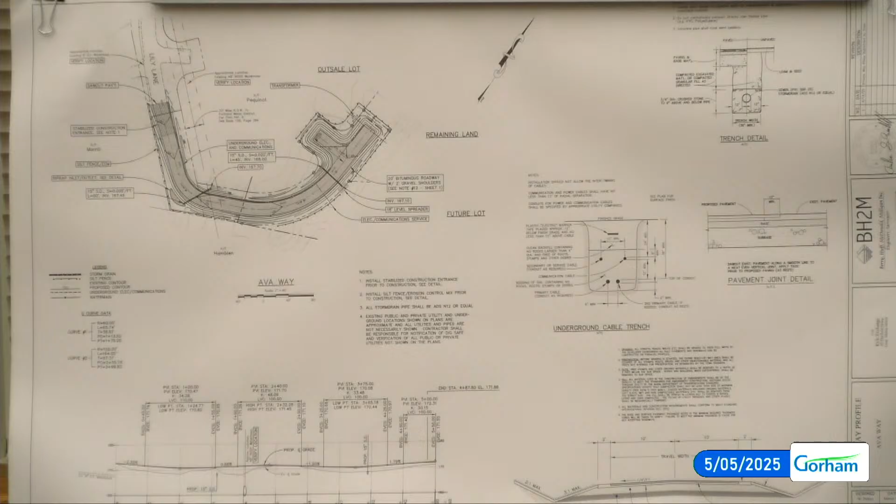So thank you, Damon, for that introduction. As he stated, this is a proposed private way, which is kind of a strange situation. This will be an extension of Lily Lane, built to a public road standard and offered to the town as a public roadway. There is no mechanism to propose a public roadway to the town directly, so the application for a private way was submitted, and if the town decides to accept it as a public roadway in the future, that's what it will be.

As I stated, this is an extension through an existing right-of-way at the end of Lily Lane that is town maintained and owned. Kyle has gotten permission to build a road through it and extend to his land to serve currently 2 lots, which will not trigger subdivision review.

Based on recommendations from Public Works, this will be built as a 24-foot roadway, 20 feet of pavement with 2-foot shoulders. This was a recommendation from Terry Deering, to have a continuous roadway through, so that if it is accepted as a public roadway, it won't cause issues with maintenance or having a private agreement off the end of a roadway, which could get tricky. So currently, let me flip this plan around.

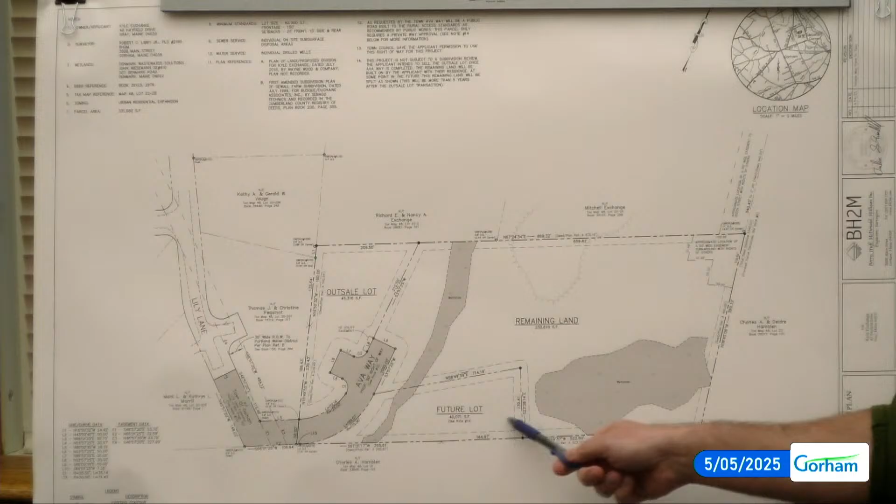Kyle is planning to split off what is shown as the outsale lot and build a house for himself on the remaining land. Just to show everybody the intent for the future, there may be a lot split at least 5 years from now in order to not trigger subdivision approval. As Damon mentioned, we'll take that off the plan to make sure there's no confusion about what's going on with the project.

During the PRC meeting, a few comments were brought up that are also in the staff review memo, including removal of the future lot from the plan and showing the snowmobile track or path on site. It's my understanding the snowmobile trail runs along the edge of the proposed roadway. I spoke with Kyle right before I got up here, and he's willing to keep that on the property as long as it doesn't affect anything. It'll stay right where it is, and if anybody's looking for an easement, that could also be talked about.

We also got comments about the Portland Water District main and crossing it. Typically they'll allow you to cross at a 90-degree angle, which we are doing at this moment, just for access over it, and we can reach out to the Water District and get approval for that in the coming days.

The plan does currently show the road as Ava Way, based on a Public Works comment, just to make things linear and make sense, with no confusion. The proposed roadway will change from Ava Way as shown to Lily Lane.

All of the comments we received from staff are mostly minor in nature, like the snowmobile trail and getting some feedback from Portland Water District. So we would love to leave here with an approval tonight, but would be happy to answer any questions the board may have and talk through the project.

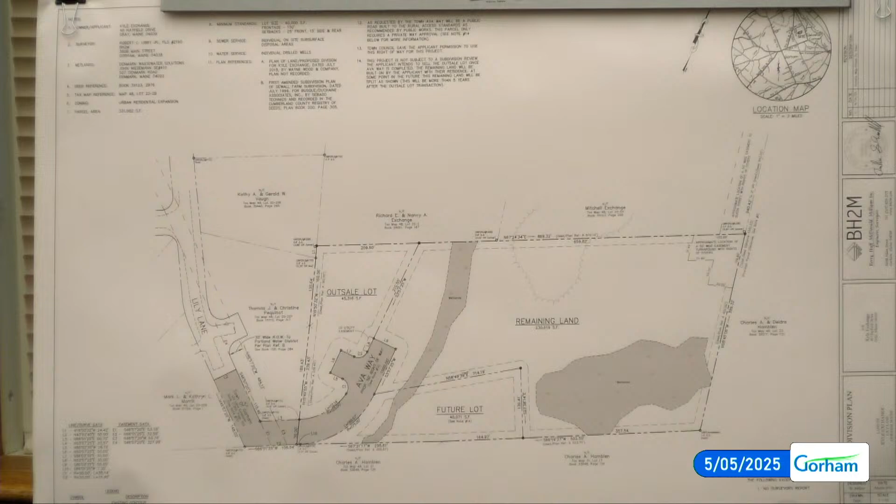With this property, this has been family land, my grandfather's land, and my father now lives out front. My brother is adjacent, and that third lot we drew on there just to be transparent, but my in-laws, my wife's parents, were looking eventually to get them closer to town. They currently live in Bridgton, so that's the idea. We just wanted to be transparent, but the overall plan is really a two-lot deal where I live on the remaining piece for myself and my family. The funny thing is I actually built the snowmobile trail when I was younger, so it was there before I put it in. We've been there for 70 years or so, and we're happy to keep it the way it is.

Thank you. Members of the board, any questions or comments? Mr. Walsh, please. Chair, just one question: can you show me how the driveway will come off for the home you're going to build? Absolutely.

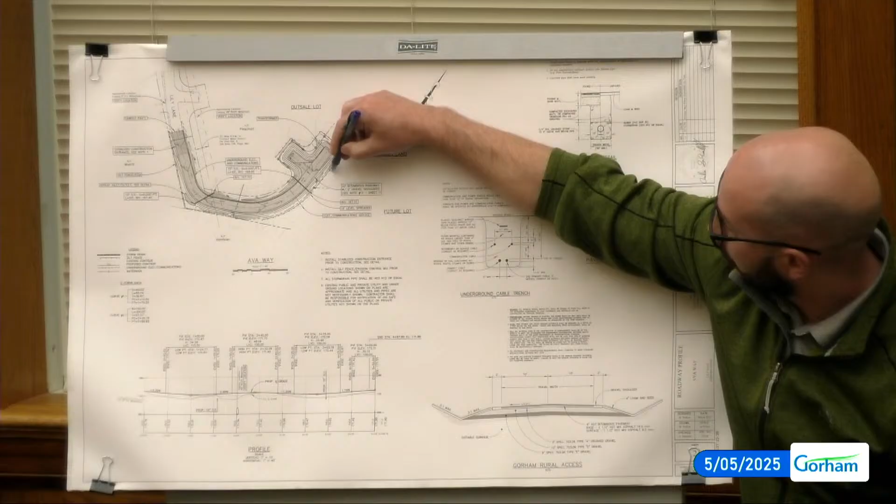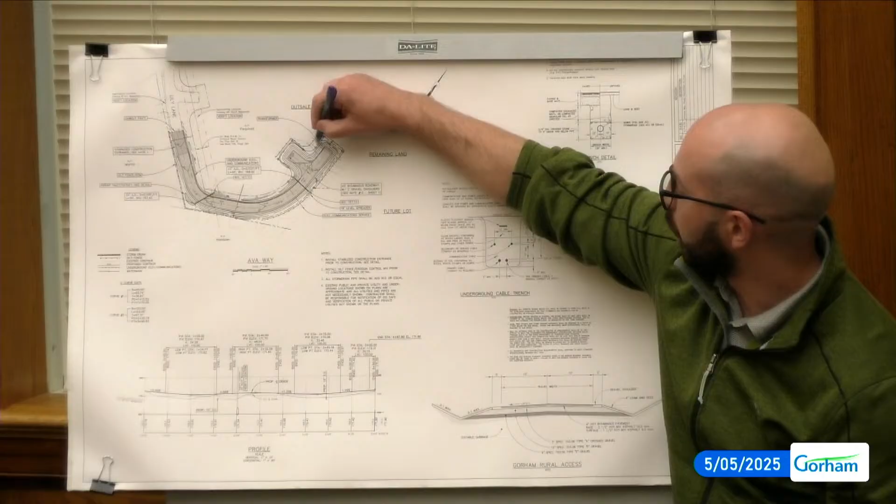For the remaining land, along this edge, I would assume towards the end of the roadway, they'll come off here. Kyle, this might be your preference. Yeah, there are two locations that could come off at the end of the hammerhead. Should be coming off the side, that way maintenance doesn't get affected with plowing, not at the end. So more or less at the end of the hammerhead, perpendicular, running parallel with the hammerhead turnaround in order to get to that lot.

Okay, as long as it's legal. I know the fire department gets really squirrely about use of the hammerhead. Fair enough. Terry reinforced it with me. I'm sure he did.

Just a question for staff? Mr. Walsh, please. No, there's a lot of yellow in through here, but it looks like just detail.

Is there anything in here that we should be concerned about, or is this stuff that you feel is just going to be cleaned up if we were to give it? What are we looking for tonight? Preliminary approval on this, or final approval?

Well, this is not subject to the two-stage approval. That subdivision is, so it's either... options are basically approval with conditions, or tabling. So yeah, there are some revisions that need to be made for sure.

One additional thing I should have mentioned is the Public Works Department was looking for a turnaround before the property line, so that's something we'd like to see added to the plan. I don't know if you had a discussion about that.

Yep, so I believe Andy and Kyle here spoke with Terry, and where this is proposed to be a public roadway, Terry was okay with the hammerhead being at the end of the roadway, so there's not a floating hammerhead on a public roadway and then an additional one after the fact. So that has been discussed with Public Works.

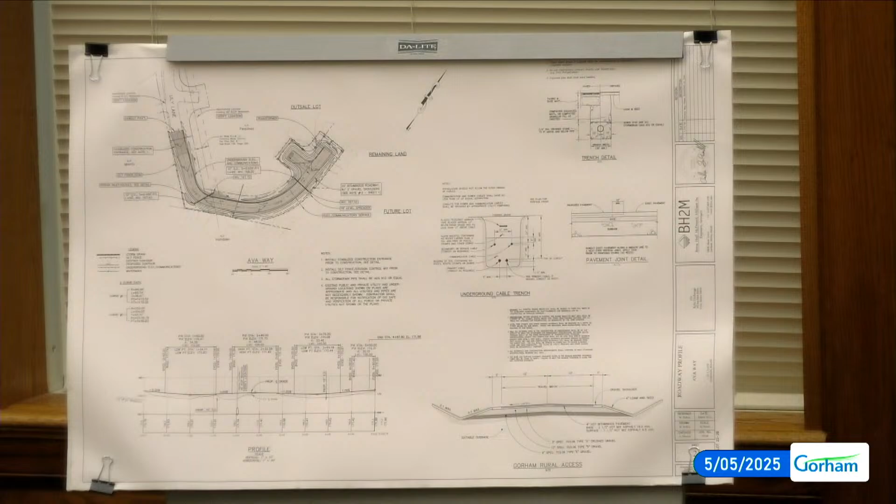That one's like 100 years old, right? Yeah, so with a water main of that size, they're not going to let you tap into it so you won't drain out Sebago Lake. Okay, but that's a big one. Yes, so just don't want to nick that one. Exactly.

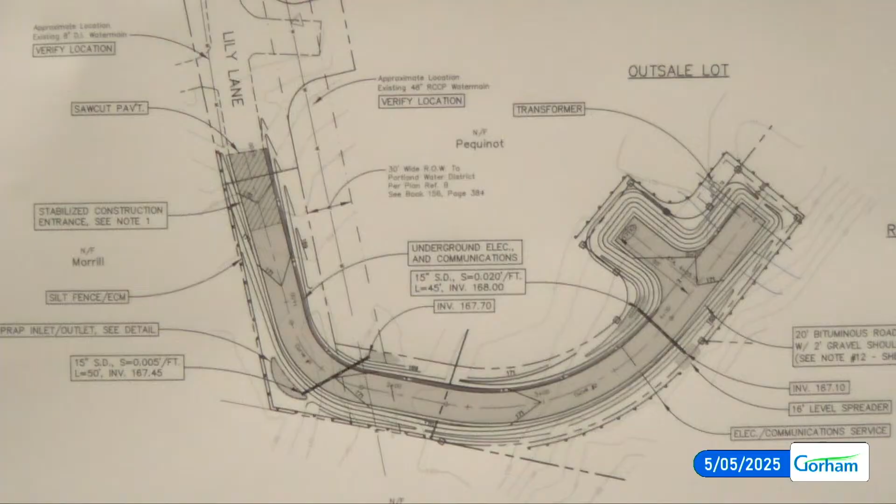And it is shown in the cross-section profile. Thank you. Okay, I have a question, and don't mind me, I'm a mechanical guy, I'm not a civil guy. If you would, in the upper right-hand corner of drawing 2, please - Note 1 says the trench width shown is pavement width for rock excavation.

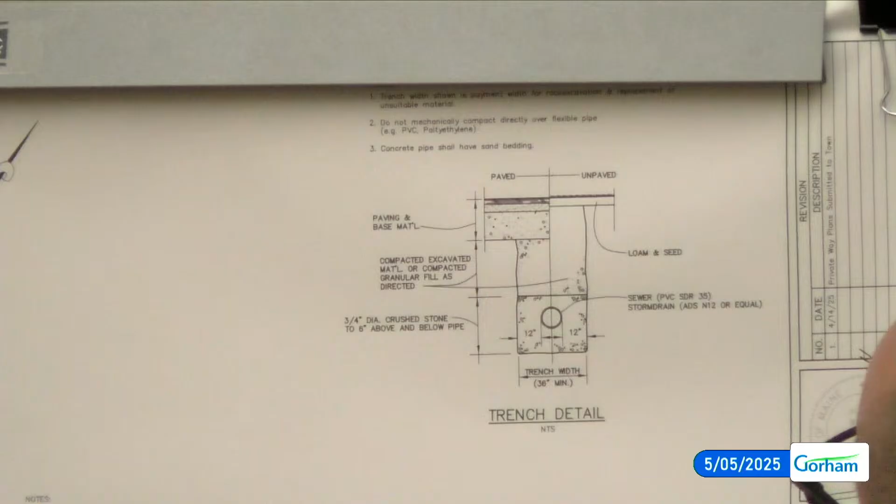That Y should be a V - pavement, it should be pavement, is that correct? Yes. Boy, you read drawings in detail.

In rock excavation, is that one word, or is that supposed to be 2 words? You're picking up on all the little things here. That's 2 words. Mr. Burrows, thankfully sitting here, reminded me years ago when I was sitting in the corner that all these things would be fixed later, and it's a discussion event, so let's discuss. That will be fixed. Is that a boo-boo? That's a couple of boo-boos right there.

Okay, I won't go any further then. I'll trust you, I'll take a double look at all of them now. On the underground cable trench, we have all kinds of widths, depths shown - I'm sorry, but we have no width shown. So it would just be whatever is required for the trench box to get in there, depending on the depth. There's really no specification that we have or any utility company has, other than making it work to install it. Well, there's some minimum requirements, so I didn't know how you were going to do that, but that's enough for me. Okay, thank you.

Anyone else? Going once?

Colonel, you look like you're going to... Sure, Mr. Chair, I'd like to make a motion. I move to grant Kyle Exchange's request for approval of a 500-foot private way off Libby Lane, designed to the town's 2-6 lot dwelling unit gravel private way standard, located on map 48, lot 22B, and situated in the urban residential expansion zone, based on findings of fact and with the conditions of approval as written by the town planner.

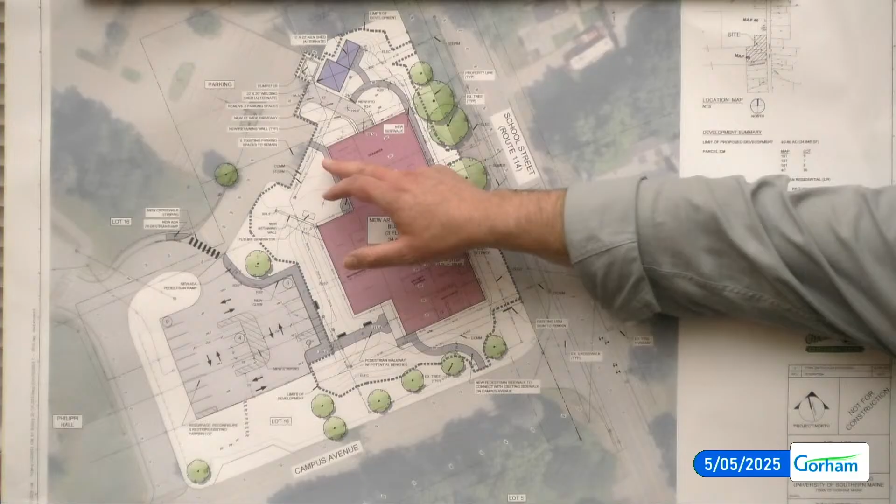The building's main entrance is in this location, as you come in just off this parking lot, so we can get a nice accessible entrance into the building. We're also looking at a loading entrance up towards the north side of the building. I say loading entrance, but really it'll be served by a box truck—they get a couple of deliveries a year for clay, so it's not heavy use back there, but they do need a place with an overhead door to get that material into the building.

As was mentioned, there's a number of programs being served in this building, from woodworking, sculpture, ceramics, drawing studios, to photography.

One of the big community assets this building offers is a great program—the rec program calls it the Art Lab. The thought is that'll be one of the classroom spaces coming into this facility, giving a new opportunity for tie-ins with the rec program and the Art Lab program.

As mentioned, we're looking at two potential alternates down the road for outbuildings toward the north side—a welding shed and a future kiln building. Those currently exist up by Robie-Andrews, and the thought is that down the road, should the budget allow, those facilities would move over here, which would be a good location with good proximity to the new building and make that connection a little better.

The idea with keeping them separate from the building is for code reasons—separate structures. We'll keep the separation distance, but having the welding and kiln together works well from a code point of view.

We also had a good conversation with the fire department about locations for sprinkler access and getting a fire truck in and around through these lots. We've run the auto-turn for that, just to make sure those fire trucks can get in and out with no problem.

And that's what I had for comments. Thank you.

Everyone catch all of that? Mr. Walsh, please—do you have any elevations or drawings of the building at this point?

We have some massing studies I can show you if you want to see those. Yeah, just more curiosity—I'd like to see what it would look like.

We haven't gotten into it yet—we're still working on programming the spaces and really trying to dive into how these spaces will lay out. So we haven't done anything with windows, layouts, or fenestration and things like that, but we have looked at massing for the campus. What we're looking at is really three volumes.

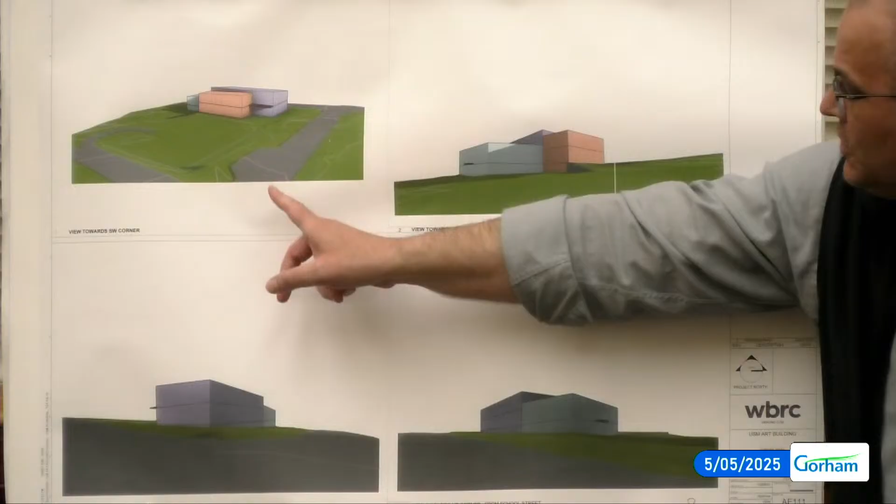So you have this larger volume, this purple tone up here, and this would be the entrance here, with Campus Ave right here. Let me use the microphone—there we go, thank you. So looking at three volumes here.

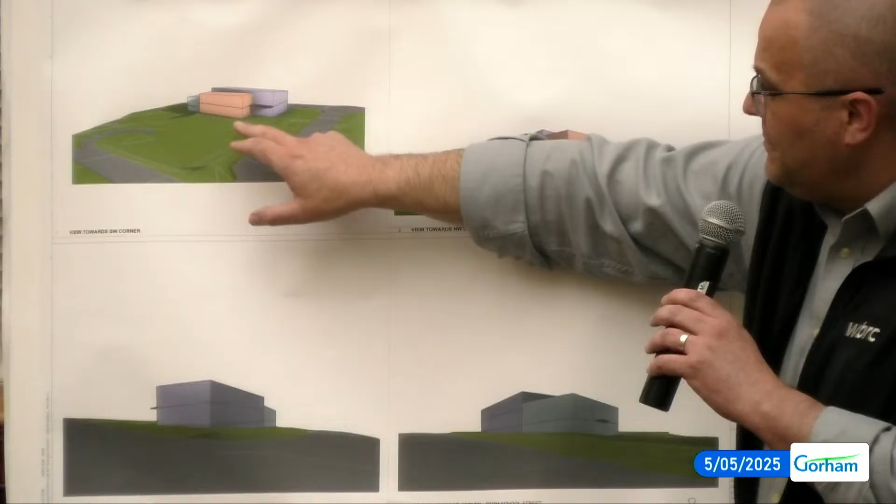Here's Campus Ave coming in, and here's the parking lot in the foreground. The main entrance to the building would be in this area. We're looking at three volumes, and they'd be flat roof volumes—a larger volume in the background, a volume that steps down in the foreground, and then this lower piece, with deliveries coming in around the back.

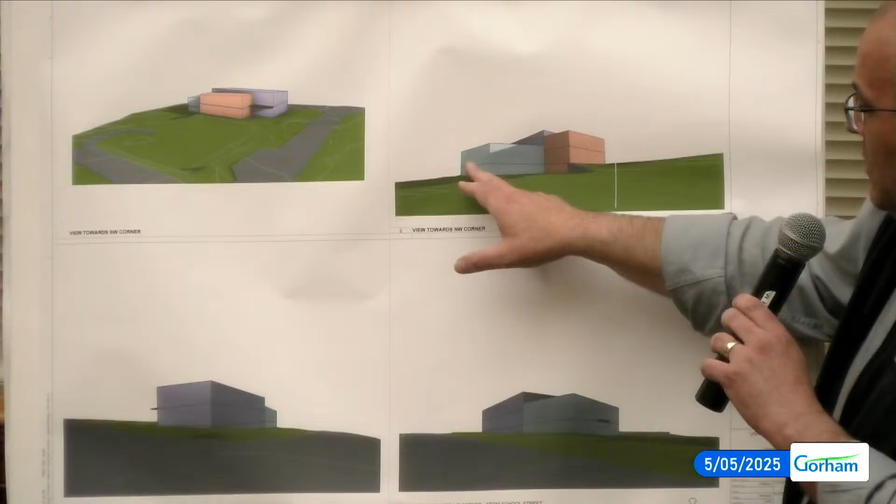We've done four views here just to give an idea from this massing. Here's the view from the northwest corner, looking back toward the building. We have a retaining wall here because of the grades we're dealing with. This canopy would be where we'd locate the overhead door for deliveries.

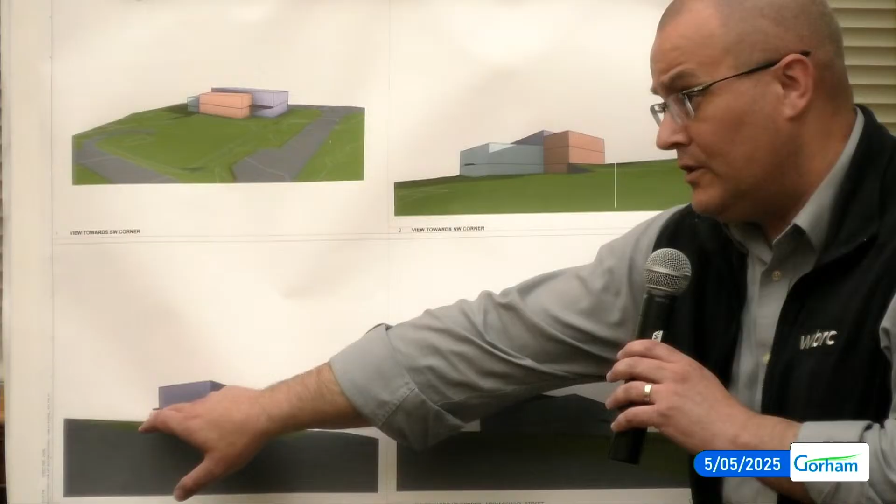If you were along School Street, looking up the roadway, here's where that overhead door would be in this mass. And if you were at the intersection of Campus Ave and School Street, here'd be that corner with the larger volume and a smaller volume in back. The main entrance would be around the corner over here. Again, these are very early concept massing studies, just to get an idea of scale for the building.

All right, that's helpful, thank you.

Mr. Frank, would you put that up on your screen again, please—on my screen? There you go. I'm looking at, you said view toward corners—are we really looking at the view from a corner rather than toward a corner?

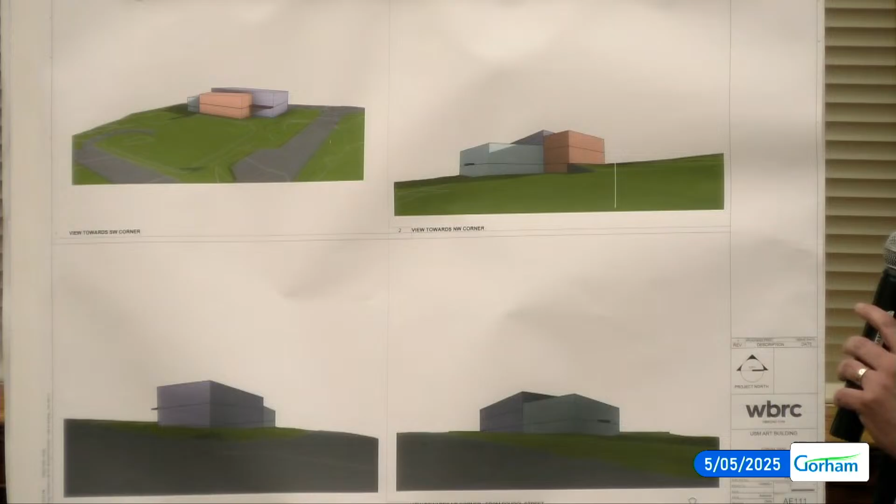This is toward the corner—this is the northwest corner of the building here, so you're looking towards that northwest corner. So we're really looking at the view from the north, standing at the northwest, looking at the building. We're not looking toward the northwest, we're looking toward the southeast—that's correct, you're looking towards the southeast from that corner.

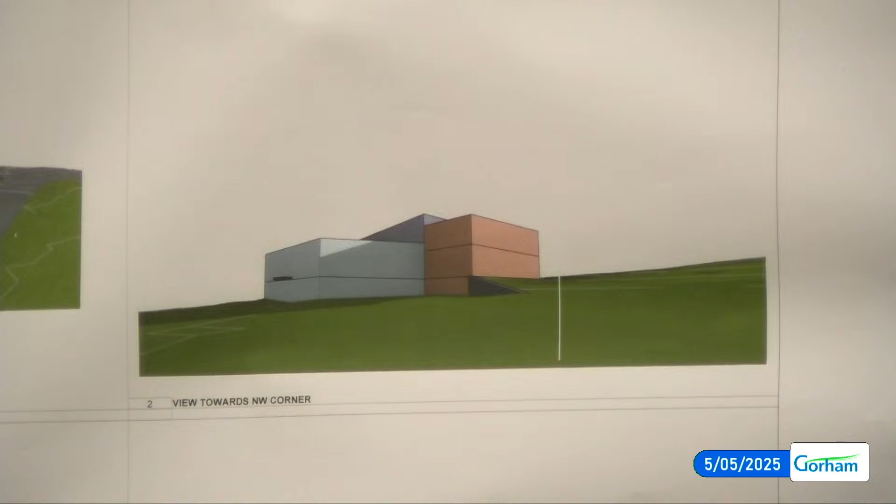Thank you. Yep, I hate to get turned around—understood.

Ms. Nichols: I know this is just all preliminary, but I live right next door to you. Presenter: So the front of the building, let me put it the other way, the back of the building is going to be on School Street.

What's kind of tricky about this building is there's really no back to it because of how it sits. We're going to have to look at the frontage on School Street, and then you have a side that faces Campus Ave, and a side that faces the parking, which is where the entrance is going to be. I'd say the back of the building is more towards the north side, where the deliveries are going to be.

So the side that most of the traffic is going to see, that I go by all the time, being the back of the building, I would imagine being an art building might have large windows displaying art or sculptures or whatever is there. That's just a wish, because I'll see it a lot.

There's sidewalks on School Street, and that might be addressed when they pave. I know you have sidewalks shown here within the structure, but what about on School Street? Will there be sidewalks coming from town on that side? They do come from town, but they're on the opposite side of the road, and at the bottom of the hill they end.

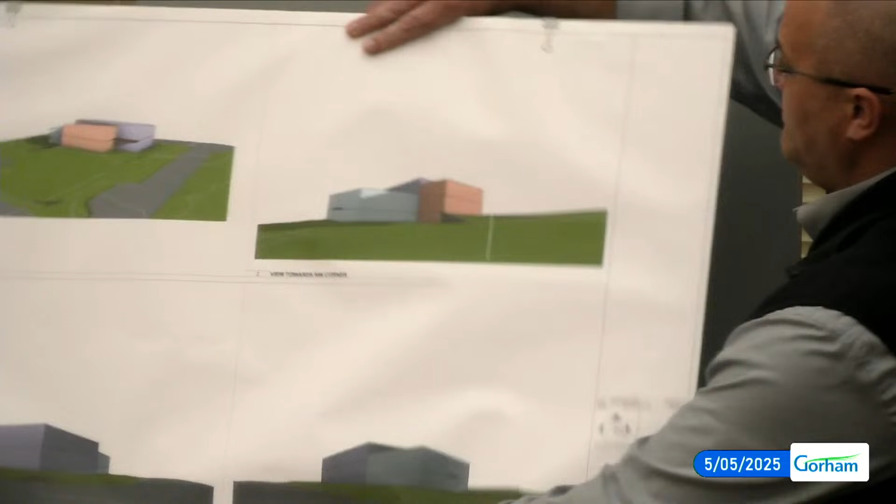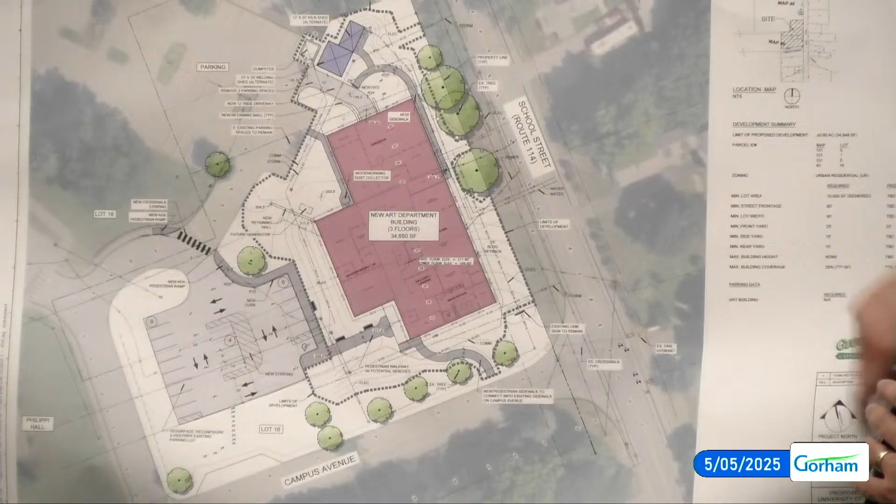If you don't mind going back to the plan view, please. So to further discuss this, for Mrs. Nichols' edification, here's the existing fire hydrant, and then there's the crosswalk. You're going from the east side of School Street, crossing over to the west side, and then onto the campus, if that makes sense.

I'd love to see that sidewalk keep going up the hill, up Fort Hill, because if you're walking into town, it's really difficult at that spot, you have to cross over because it all crosses there. I didn't know if that was going to be part of the building plan, having sidewalk on both sides of the road at that point. But it makes sense.

Mr. Walsh: Could you tell us a little bit about stormwater management for this building? Dave, do you want to talk a little about stormwater? I'll let Dave handle that.

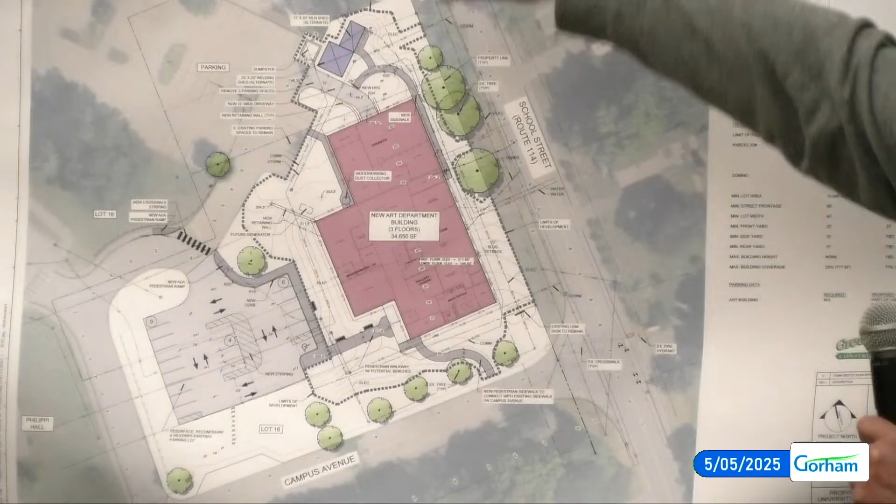Dave Woodward, WBRC, good evening, happy Cinco de Mayo. There are stormwater catchment facilities on campus just to the north. This existing parking lot drains to that currently, so drainage around the building is most likely going to be picked up with foundation type drains and discharged to the stormwater system in School Street. It's pretty basic because we're not building new - this parking lot's existing, and it'll most likely be resurfaced and striped so it looks nice, but that's not new impervious surface, and it's already being treated.

So the stormwater off the roof of the building is going to go towards School Street or towards your existing stormwater system that the parking lot slopes to? Currently, the idea is that would be treated and then a drainage pipe connection to School Street.

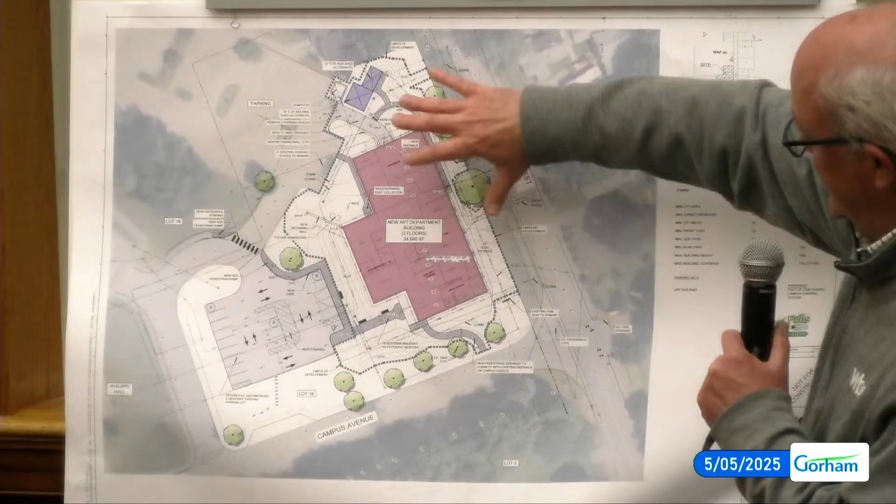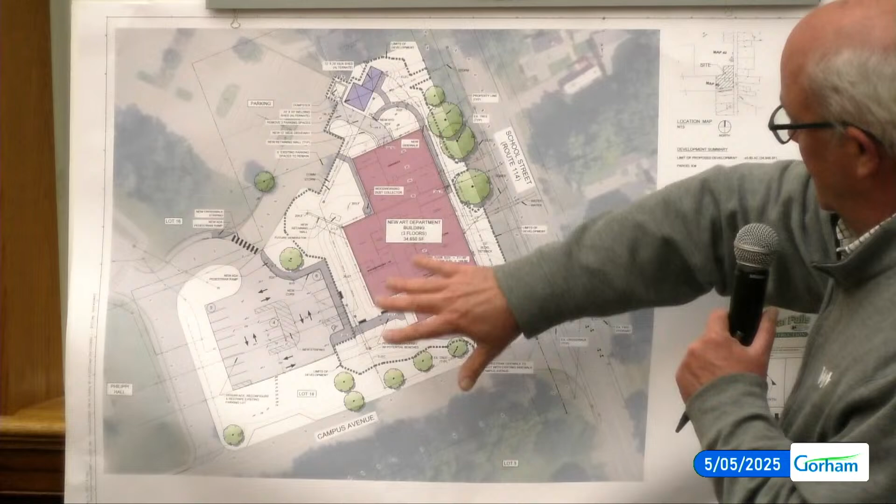Well, the campus has a huge plan, right? It's divided up into watersheds. Yep, this was like a fraternity house - this part isn't really included, there's these lots that were merged in that aren't really included in that. So there's a bunch of drainage that comes off, and there's a stormwater pipe here that just goes right into the storm system. But we're trying to improve on that, so we're just going to treat the roof and then discharge into that pipe in School Street.

And is that the one that goes down to Tannery Brook?

Yes, I believe that's where it goes. Okay. Yeah. Mr. Frank?

Your elevation drawings, your roofs don't all go in the same direction, from what I remember, correct? Yep, that's correct. The three different volumes have three different roof slopes, heading in different directions. Again, we're trying to break up the overall mass of the building to break the volume down.

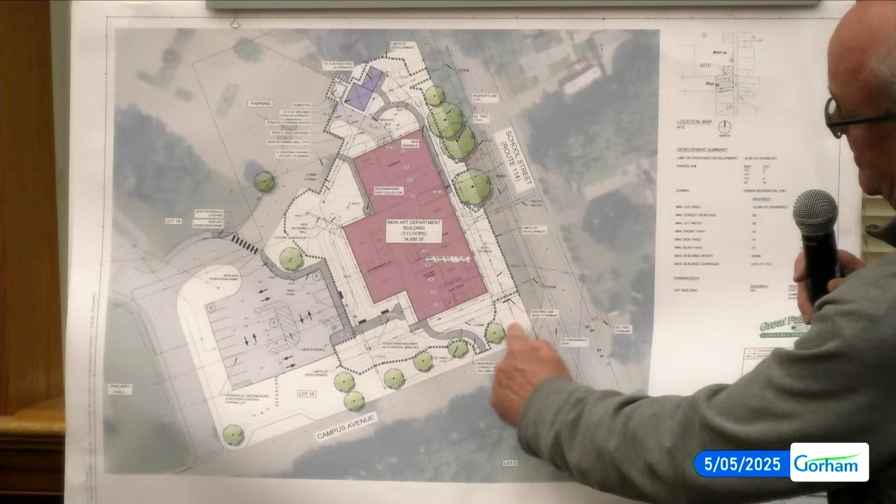Anyone else? I did want to mention, because we had a meeting with some staff, and there was some discussion about possibly the town doing the improvement, to have this cross here and then over, because this is kind of an awkward, long crossing. So this would be a shorter crossing, but that's something the town's thinking about doing at some point in the future.

One other question: will there be any lighting impacts on the neighbors across the street? The thought process with the lighting right now is given the proximity of the building, we'd handle it with building-mounted lights for any site lighting we'd need around the building, but we make sure we have cutoffs on all of those so we're not dealing with any light trespass issues and things like that.

All right, so you've already taken that into account. Yeah, it's going to come back when we get our final window layouts from the building, and that's something we'll have to look at for the overall scheme of the elevations. All right, thank you.

Anyone else? Gentlemen, if you don't mind, if my memory serves me, WBRC is from Bangor? We have a Portland office. Oh, that's fine, no disrespect. But under your title block, you just have a website. Are you going to add your formal address? Yeah, we can add that on the drawing, that's not a problem. We will do that. Just as a matter of record, thank you.